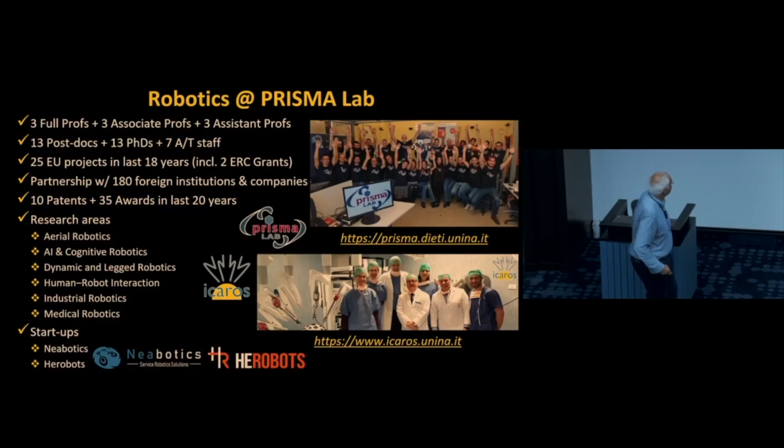And then recently, we've been active in AI and cognitive robotics. Two of the faculty in our team are not engineers, they are computer scientists, because I really like to have an interdisciplinary group. And also, following my ERC Advanced grant, we started working on dynamic and legged robotics, although this is more recent work. This was kindly mentioned by Cecilia.

This was a textbook, but it's now the old textbook, published in 2009, and it was translated into Chinese, into Italian, because the original book was in English, and also into Greek. And this was a sort of accolade for me, because in Italy you can do either the classical or the scientific high school. And since I was good in math and physics, I studied in the scientific high school.

But I always liked human sciences, like literature, philosophy, history, and also Greek. But I didn't study Greek. At least I can say that I have a classic book in Greek, although this is modern Greek, not ancient Greek. And the other day, I got an email from the publisher, because we have a new textbook, Foundations of Robotics.

This was published in September 2025, and the book is radically changed. It's been extended thanks to the contribution of a new co-author with us, because Professor Sciavico, who was my mentor, retired and is no longer active, and we were very lucky to recruit as a co-author Alessandro De Luca. He's a professor of control and robotics at Sapienza University of Rome.

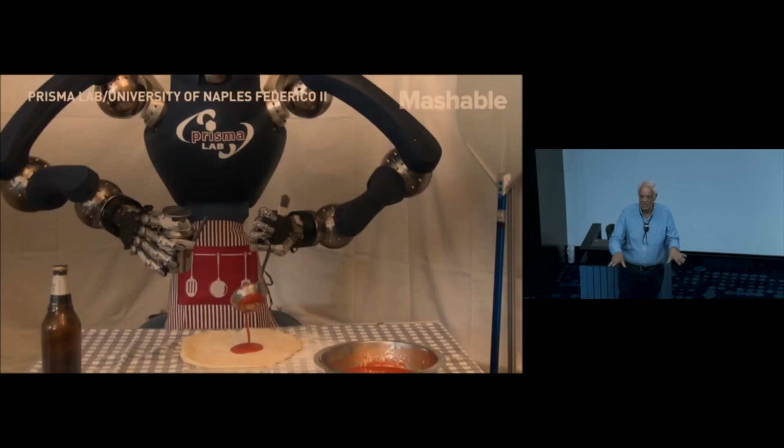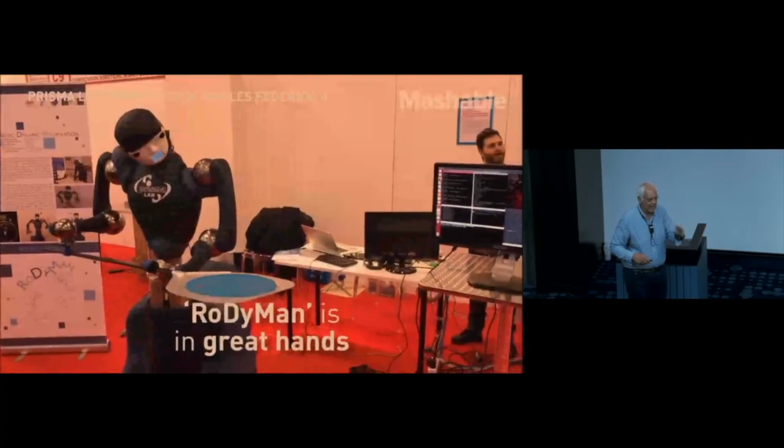Why? This video had, I think, several million views on Mashable platforms. When you have the dough of the pizza, you stretch it, so it's undergoing deformation. Is a robot capable of doing this? I don't know. Seasoning is the easy part. Tossing is very difficult. And we didn't succeed with electric motors, because you cannot succeed with an electric motor in this kind of tossing.

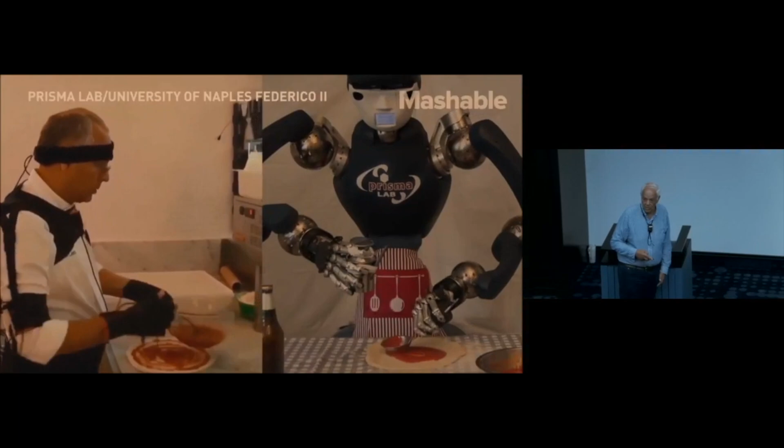Baking is a control challenge. This is a pizzaiolo chef that we involved. He's been the first pizzaiolo chef in the Michelin guidebook, one of the best pizzerias in Naples and probably in the world. We were acquiring his motion from an Xsens suit, and through the Jacobians we were transforming it to the kinematics of the humanoid robot that we developed. We also developed software with the avatar, with this biomechanical data. So cooking the pizza is a control challenge, and I will explain this in a minute.

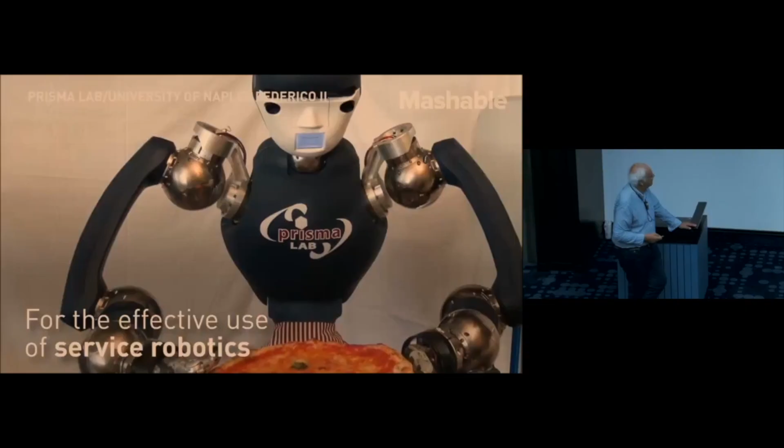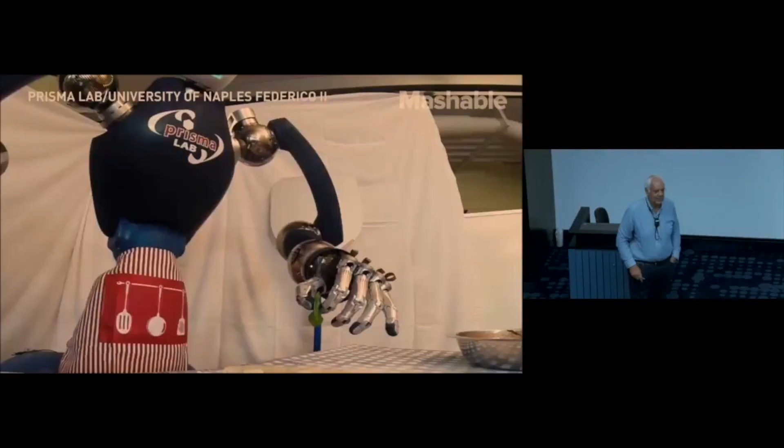So when I proposed this idea to my students, they said, Professor, you're crazy. We cannot ask 2.5 million to the ERC for a pizza-making robot. I said, look, the challenge is not to replace the pizzaiolo. It's just to show the complexity of the benchmark. And it was also a great media expedient to attract the attention of popular media to research in robotics carried

out in Naples. We were featured by BBC, by CNN, by Sky, by Scientific American. We were on page 3 of the Times newspaper of London, because of the idea. And during the life of the project, from 2013 to 2019, pizza became UNESCO heritage. So you can imagine that everybody was contacting us. So this was a sort of smart dissemination idea.

But let's look at the challenge. Why non-prehensile manipulation? What do you gain with non-prehensile manipulation? Actually, we do a number of tasks in which, of course, we want to use the hands, but the power of manipulation. Remember the old concept developed by Ken Salisbury at MIT, WAM. WAM stood for whole arm manipulation. We can do manipulation also with our body, with our arms. So it's the same concept of soft robotics, of the tentacle of the octopus.

So we have to just break the paradigm that, of course, a child in the first months of their life, infants, what they do, they just grasp all the objects, okay? But also we learn how to manipulate with our body. And the difficulty is that the modeling and the dynamic issues of non-prehensile manipulation are very, very challenging. And it's impossible to develop a sort of general theory. So it was a sort of groundbreaking challenge that we were tackling during that project.

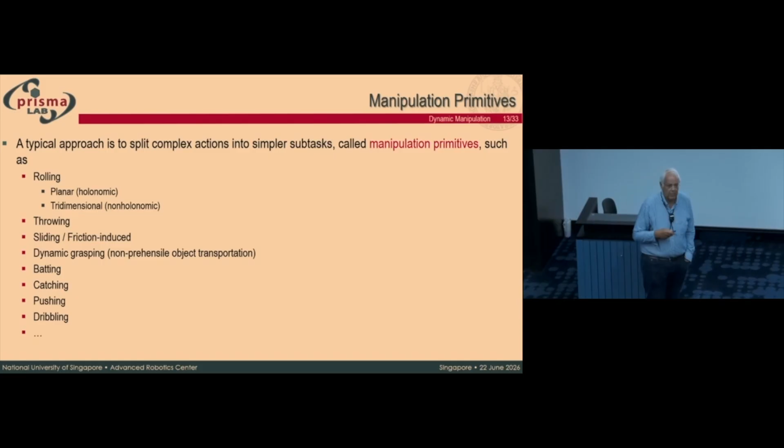So the best we could do is to develop some sort of manipulation primitives and to solve with some kind of model-based control techniques challenge by challenge. So we analyzed rolling, throwing, sliding, friction-induced, dynamic grasping, batting, catching, pushing, dribbling; these are all examples of dynamic manipulation. Let me show you some results.

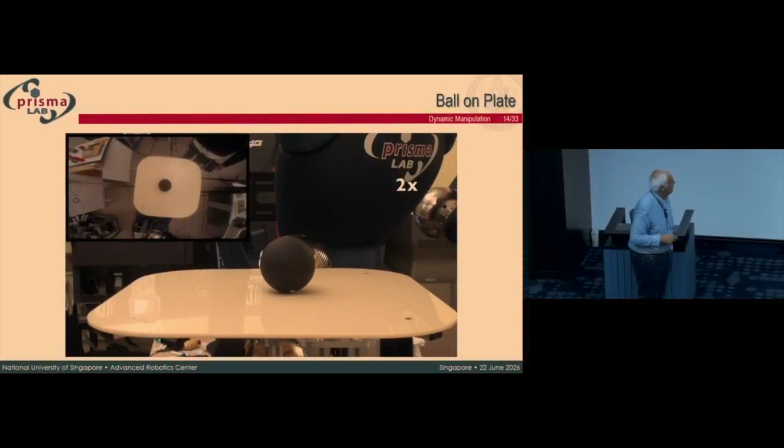So at first, like balancing a sphere on a plate. And as you see, that's the camera, that's visual servoing. So basically, we want to stabilize the position of the sphere on the table. This is a sort of nonholonomic constraint, because basically the motion of the plate is 2 degrees of freedom, and that's doable. But you also see that white spot.

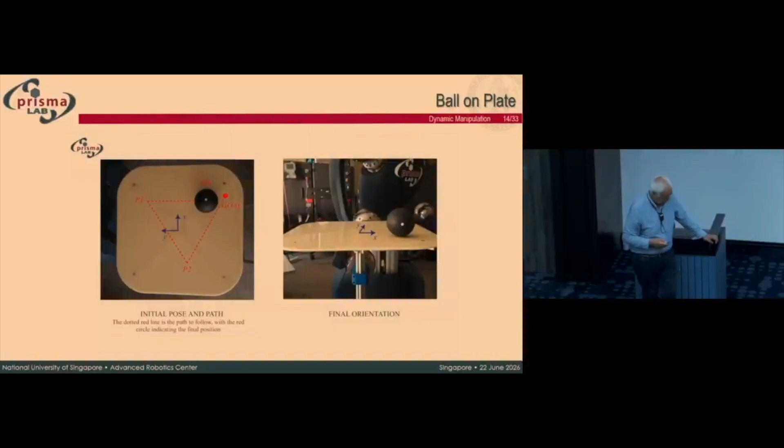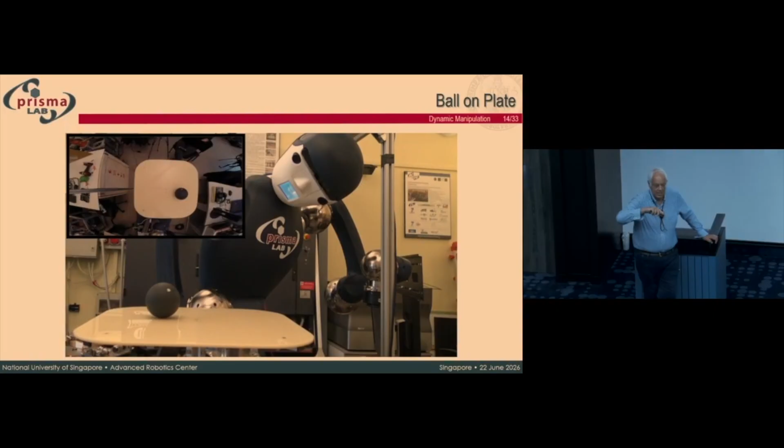Now, we want to control 3 degrees of freedom. So we want to control not only the position of the sphere, but also the orientation, that is that kind of white spot. And here you see the exploitation of redundant degrees of freedom in such a way as to reconfigure the humanoid hyper-redundant system to perform the task successfully.

And then you can also do a sort of movement along a path with a suitable trajectory. And likewise, you can do this in a stable way.

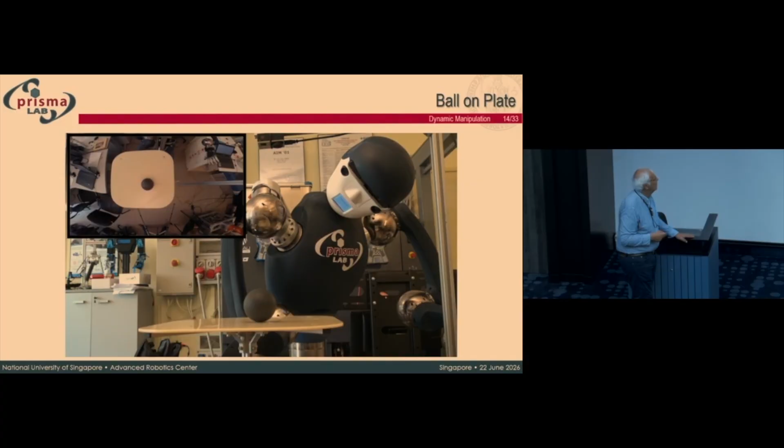Then we extended this work, and now the ball is a kind of tire. And the ball can fall not only on the two sides, but can also fall on the other side. And as you see, with visual servoing, it's capable of stabilizing the ball without falling from both sides. So this is just to show that this would be a task that for a human would be very, very difficult, because it's kind of a critically stable system, as you see.

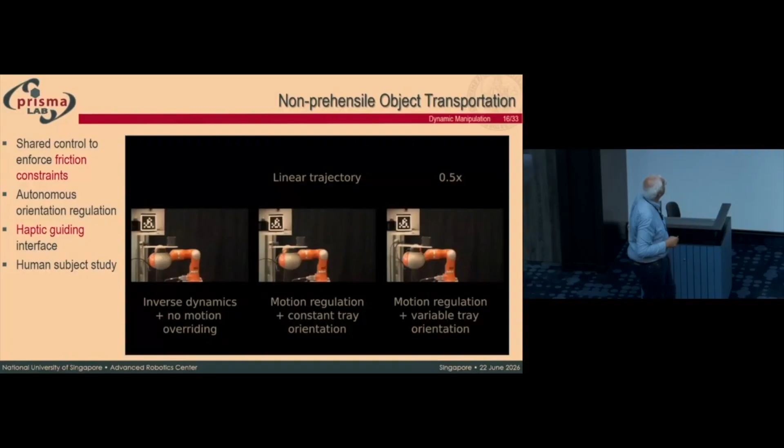Then some other examples of object transportation. This was a recent paper published in Transactions on Robotics, in which we were testing different kinds of algorithms. But the novelty of this study is that we involved human subjects with a haptic guiding interface. So basically, it's like a waiter, like a robot waiter. You have to carry an object on a tray.

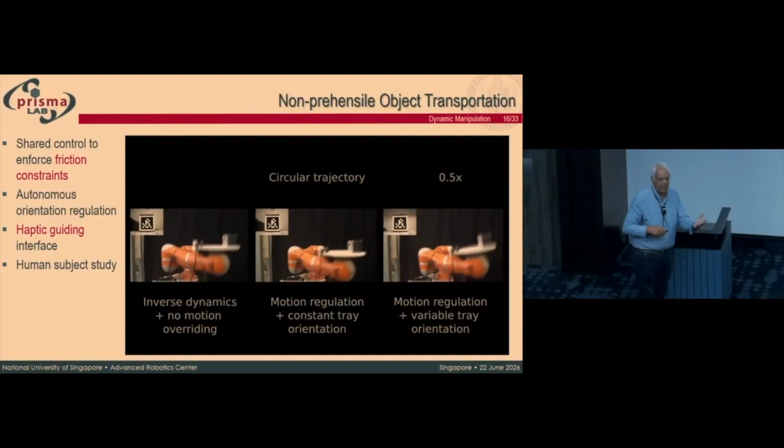And typically, if you want to do this kind of task autonomously, you can, of course, exploit the friction constraint. I don't want to go into technical details. I try to give a sort of overview. So these are different kinds of dexterity measures that we are using, with different conditions. And in most cases, what happens is that typically the object just falls apart, just because of the dynamics of the task.

And instead, with our kind of new scheme that we developed, in which we use the shared control. So this is a human in the loop. So that's why this is interaction. This is a physical interaction. So you see the haptic interface, it's capable of moving the object around without falling.

Okay, and this is something that I haven't seen yet in humanoids. So can you imagine a humanoid to do this? Personally, I doubt that you can do this kind of task, just as commanded by a human.

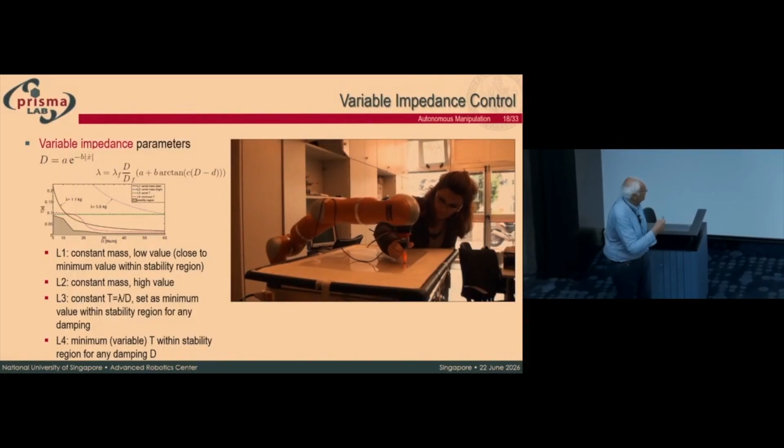So the second part is devoted to autonomous manipulation. And this was mentioned by Marcello when he introduced me to his students. We've been working consistently on force and impedance control. This was a study done in one of the European projects. It's the concept of variable impedance control.

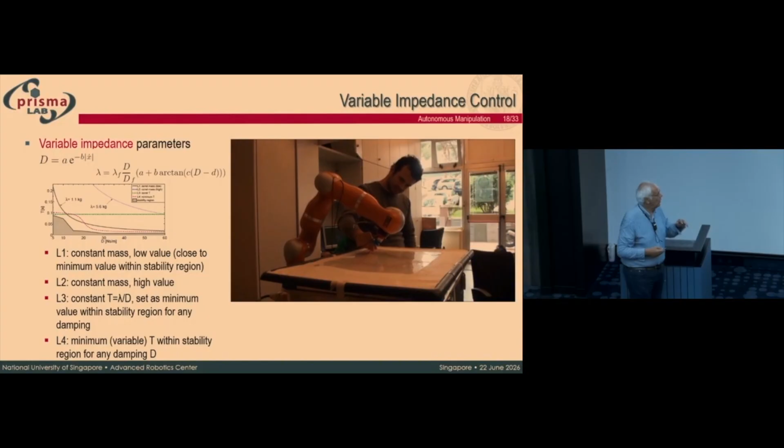So basically, this is a cobot, because it's a KUKA lightweight robot, so it's compliant, but the user might be different. And this is adapting naturally to the inertial characteristics of the user to guide the user just to draw with a pen on a sort of flat surface. And here we are testing different manipulability indexes.

And the nice thing of this study is that you can adapt the parameters of the impedance in such a way to naturally adapt to the inertial characteristics of the human, just to offer the smoothest possible guiding of the pen of the robot by the human. You saw like 6 different people doing this kind of task, and this worked quite effectively.

I've been teaching robotics now for 35 years. And when I go to class, one of the first concepts that I fly into the audience is that robotics is not much more than Jacobians. The Jacobian, in my opinion, is the most important mathematical tool for robotics. And this is one example.

Now we go back to prehensile manipulation, like with the hand, okay? And the problem of mechanical hands, of robotic hands, is the mechanical complexity. Because a hand has 20 or more degrees of freedom, and it's impossible to conceive a hand with 20 motors. This would be very, very primitive.

So one trend in designing anthropomorphic multi-finger hands was the concept of minimalism, the concept of reducing the number of motors and using cables and tendons to achieve the actuation with a reduced number of motors. And actually, this is one example of cross-contamination with another field, because a colleague of ours at Arizona State University, Marco Santello, a neuroscientist, developed a very nice taxonomy of all the possible grasps of a human hand, and he classified 36 different grasps.

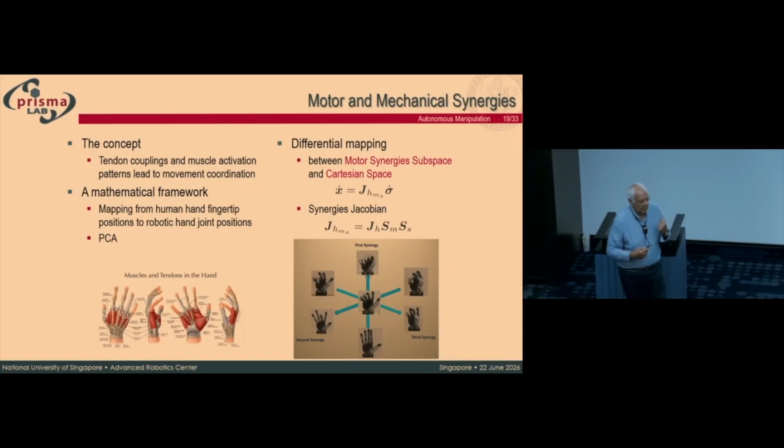And the nice thing is that in these grasps, humans do not move the individual phalanxes of the fingers. You really have to think intentionally to move a single phalanx of a finger. We move the hand and the fingers in a sort of synergetic way, even infants when they grasp the object. So his studies show the concept of postural synergies. What is this concept of postural synergies? It's very simple. Basically, the motion is not of the individual finger, but you move the fingers all at the same time.

And this is one example where the mathematics is beautiful, because this is nothing else than the principal component analysis of the grasp matrix, singular value decomposition. So you compute the main eigenvectors of the singular value decomposition, and the nice thing is that with the first 3 eigenvectors, these are the so-called postural synergies, you can describe more than 80% of the taxonomy of the grasps by the neuroscientists. So this is amazing. So in a way, why should we dare to control 20 plus degrees of freedom?

So this can be used in terms of the suitable Jacobian, the suitable mapping from the motor synergy subspace to the Cartesian space. And it's all a game of Jacobians. But we could use this in a sort of constructive fashion to rethink the design of hands in such a way to have a hand with one motor, with two motors, and with a system of cables and tendons to achieve the different degrees of freedom. So this is the concept of mechanical synergies.

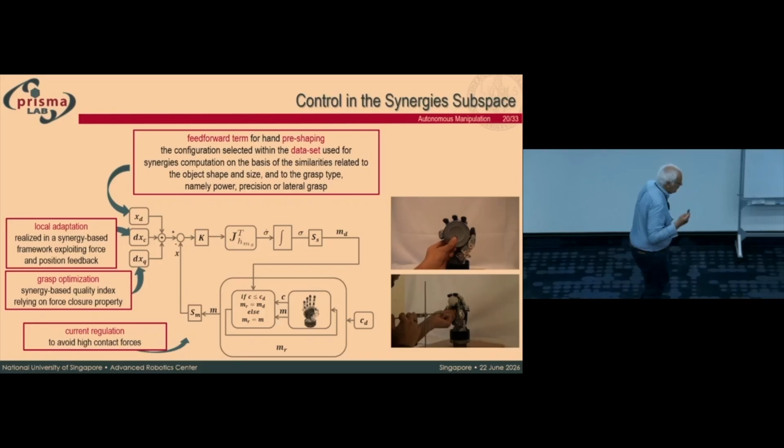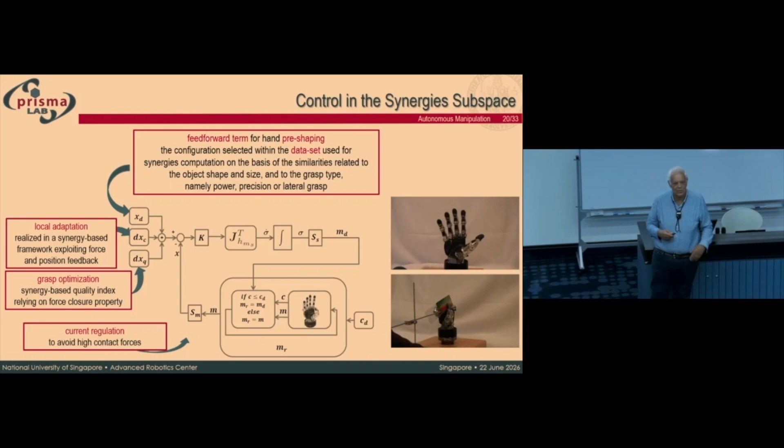And we apply this kind of framework within, I mean, if any of you has studied on any of the textbooks, you know the famous CLIK concept. The CLIK concept is the closed-loop inverse kinematics concept using the Jacobian inverse or pseudo-inverse or the Jacobian transpose. And this is one application.

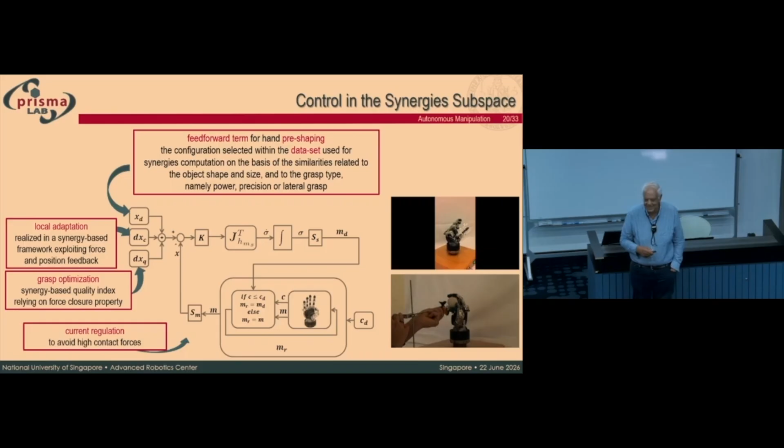I made one mistake when I wrote the first paper in Transactions on Systems, Man, and Cybernetics in 1986, because before submitting the paper, I should have patented this. But at that time, you know, I was a young PhD graduate, so I was only daring for the glory.

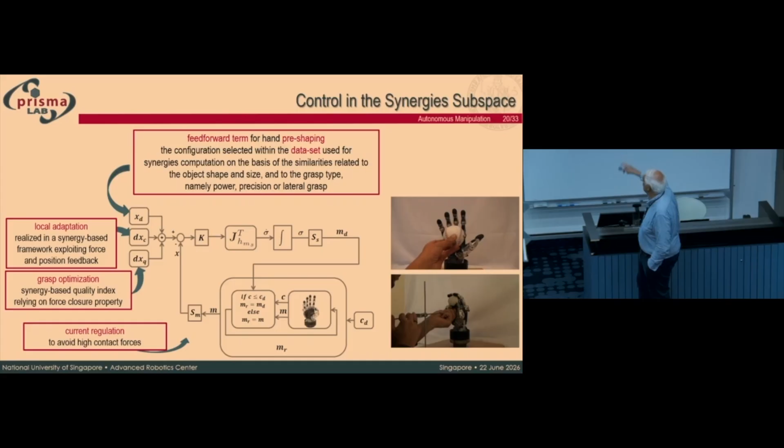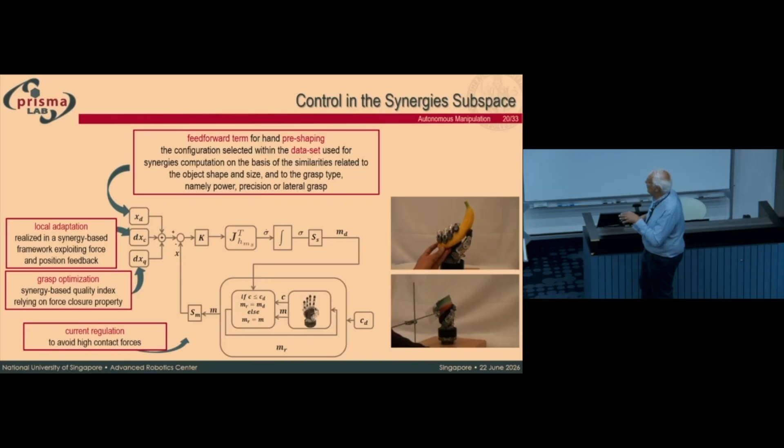I didn't think about just making profit about this. But this concept has been used in all commercial systems. And we extended it in this study; this is the Schunk 5-finger hand, in which we use the concept of the Jacobian transpose. The novelty here is that we provide the reference motion according to a synergy-based framework in which we also exploit feedback from the encoders and also from a force sensor.

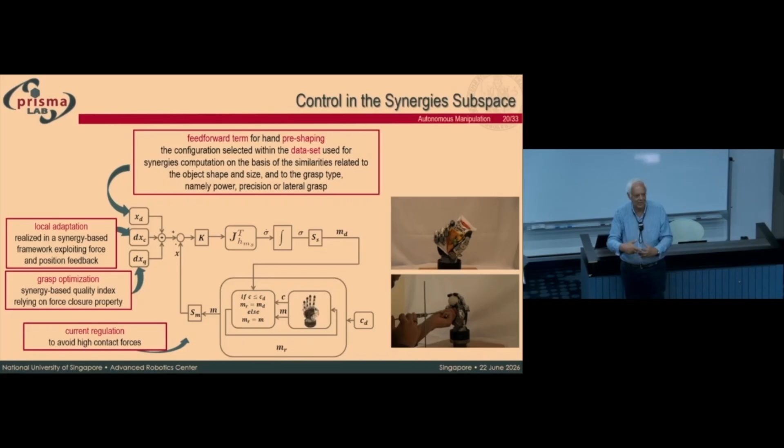We use a force torque sensor. I think this was a JR3 sensor, if I remember well. So we can generate the desired motion also with a sort of grasp optimization technique in which we optimize a synergy-based quality index, because we have to ensure that the grasp satisfies the so-called force closure property. This new stuff is in the new textbook, because we included cooperative manipulation and grasping, which was missing in the old textbook. So this works quite effectively for different kinds of grasps.

And also, there is a sort of reward function that is driving the neural network, in which we achieve a sort of trade-off between the exploration by the hand of the environment and recognizing the object, and the exploitation of the characteristics of the grasp, just to recognize how to properly grasp the object. And this worked quite nicely.

As I mentioned, aerial manipulation became a main topic in the research team. And again, there is an anecdote, a story behind this. I remember this was 2009. I got a phone call from a colleague and a friend at University of Bologna, Lorenzo Marconi. He's a control guy. He had started working on aerial robotics because he was always using drones also for photography and things like this. And so he called me, saying that he was proposing this new European project on aerial manipulation.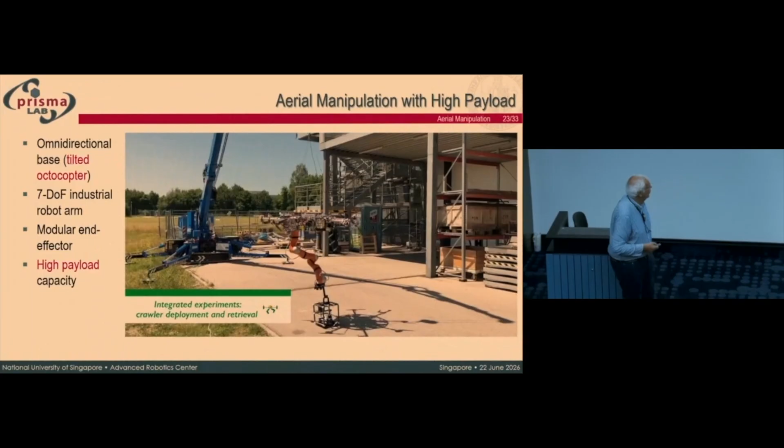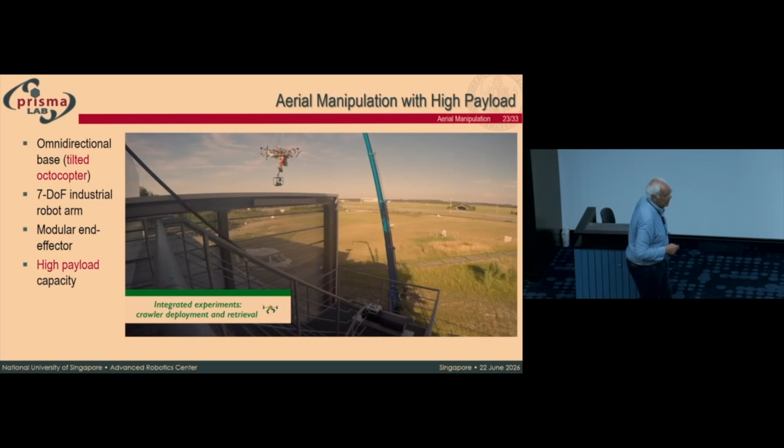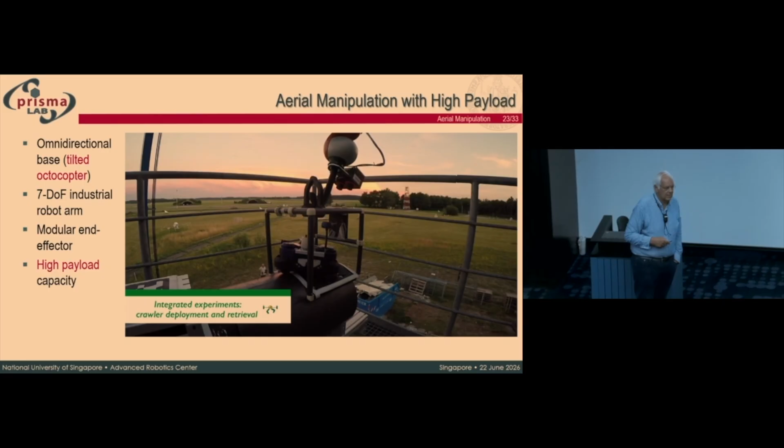This is not the AIRobots project. It's a following project, the AEROARMS project that we did with DLR and Sevilla and other partners, in which we were using the KUKA lightweight arm as a payload for a huge octocopter. So this drone has 8 powerful motors. Of course, autonomy is always a challenge, but we have some experiments of crawler deployment and retrieval. So you can control all the degrees of freedom of the system to do some tasks autonomously using the well-known KUKA lightweight robot, with the very high payload capacity.

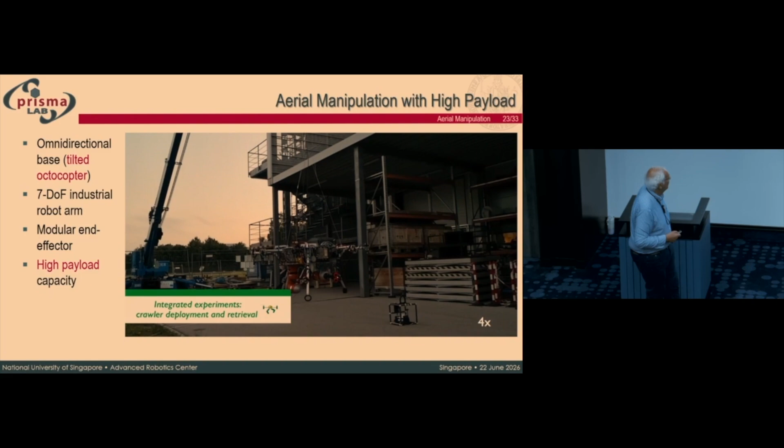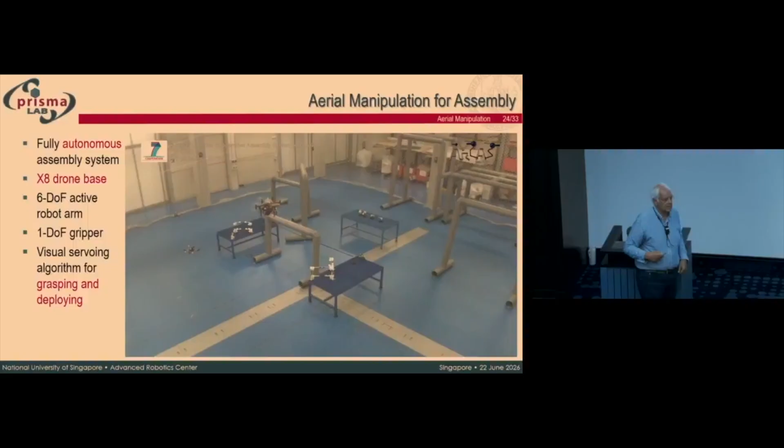Another example of manipulation with a sort of bimanual system. So this is the ARCAS project. ARCAS stands for Aerial Robotics Cooperative Assembly Systems, in which this is all autonomous. So we have an X8 drone base with a 6-degree-of-freedom robot arm on each drone, and then a 1-degree-of-freedom gripper.

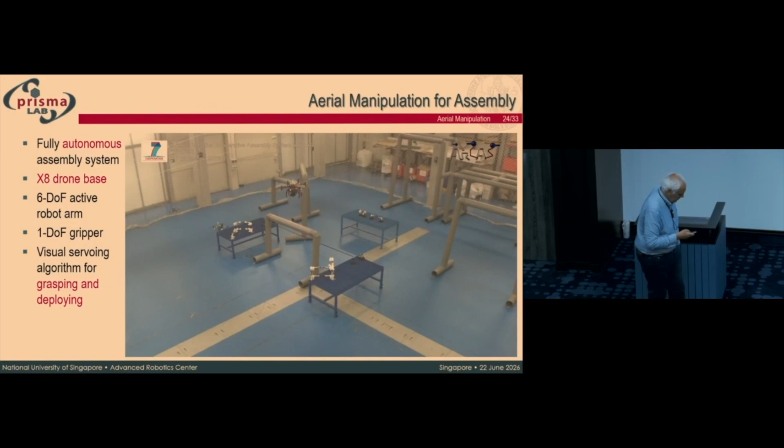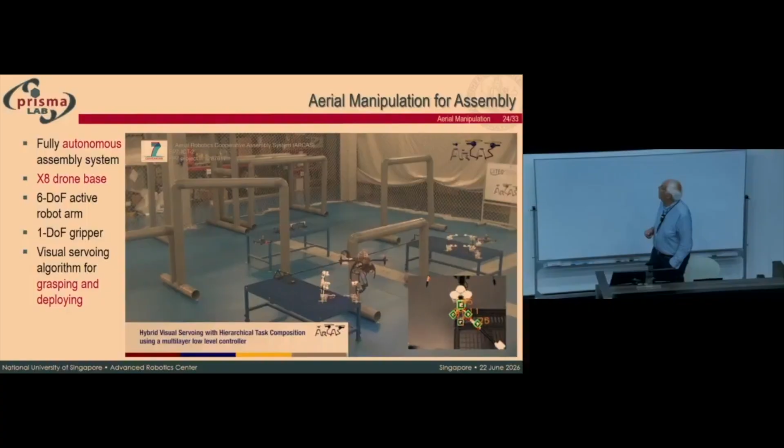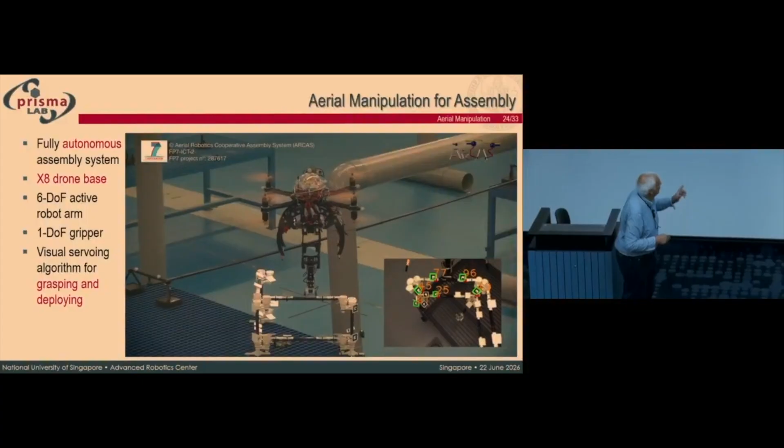And this is a typical industrial environment, a cluttered environment. So the system is avoiding all the obstacles. And so you carry this. This is typical mounting of a sort of truss structure in which we do cooperative transportation and deployment.

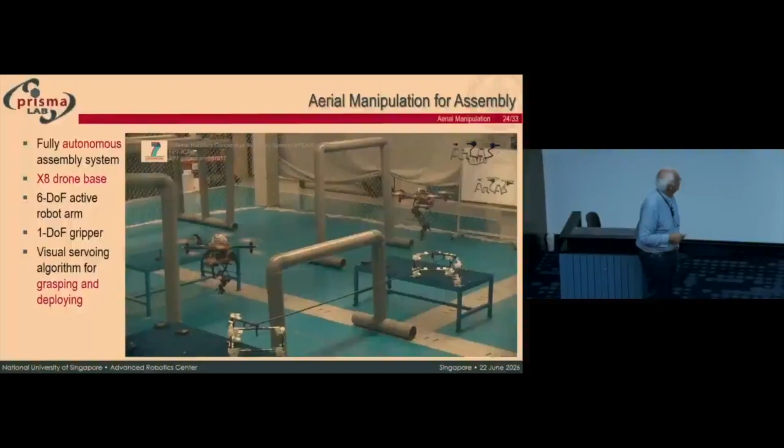Then I have another application for power grids. This is a task that is both expensive and also sort of dangerous: inspection, maintenance and repair of the power grids. And here we brilliantly solve the issue of autonomy of the drones by installing some autonomous recharging station on the line to exploit the magnetic field, so the drone does not have to fly back but recharges while on the line.

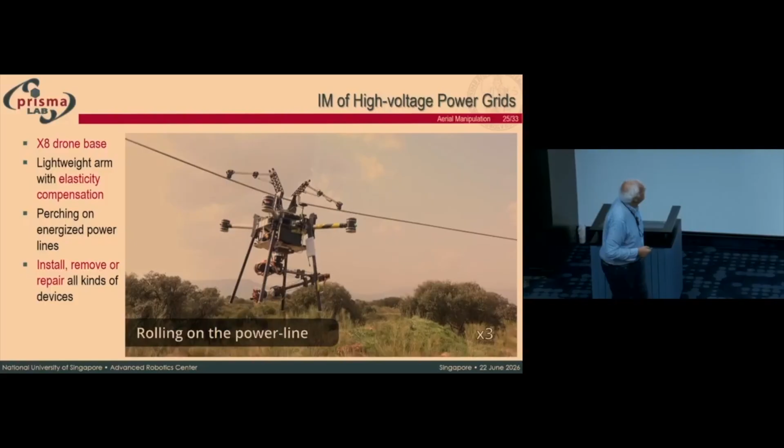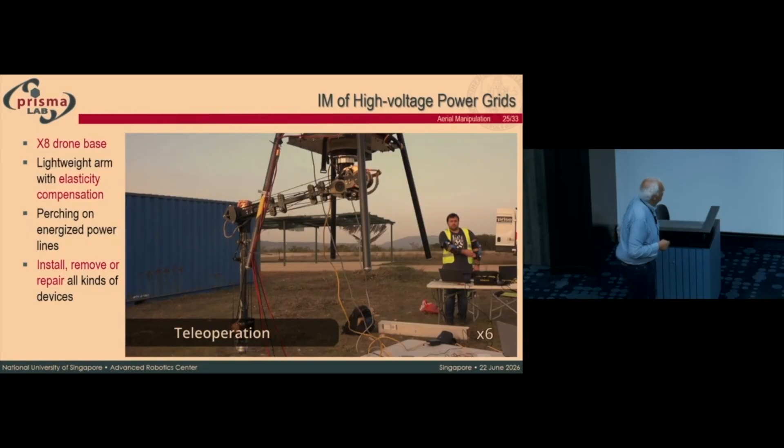And the issue here is the installation, removal, or repair of all kinds of devices. So the system can be teleoperated, if you wish, by a trained operator. But then it flies on the line, it just lands, and then it has some kind of rolling wheels to go along the line.

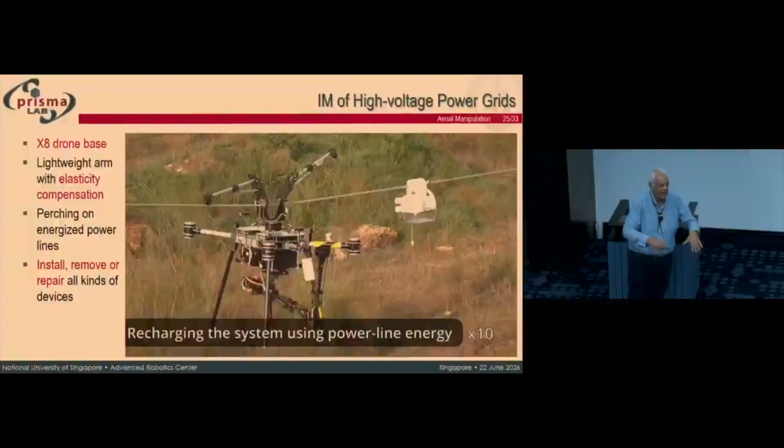And this is, for instance, the installation of a bird diverter, because when the birds migrate, they tend to just sit on the line and they overload the line, and the line can even be broken because of the weight of many birds, or maybe they get kind of dirty. So they use this kind of bird diverter.

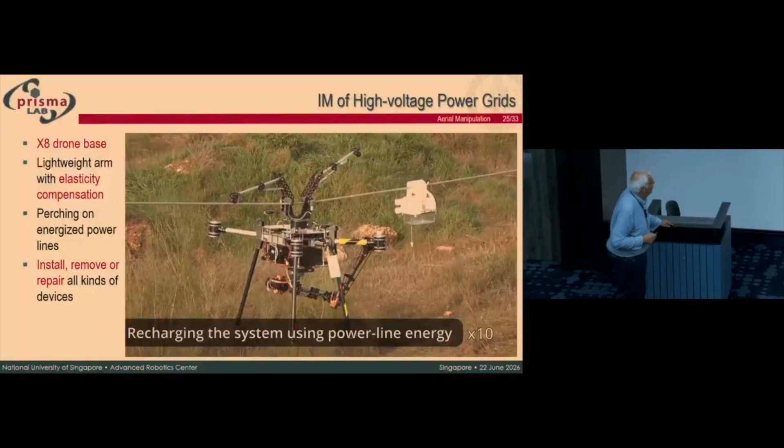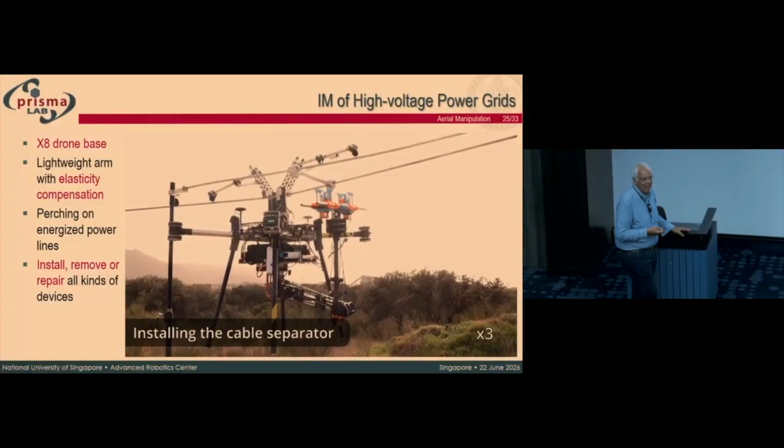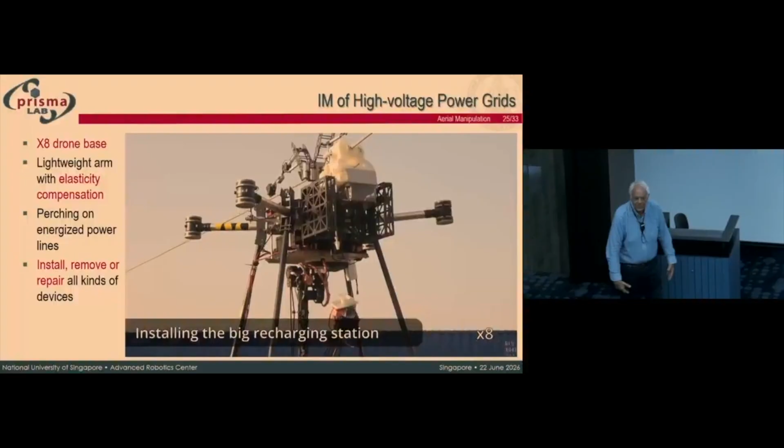And the nice thing of this project is recharging the system using the power line energy. So basically, you can exploit the fact that you're repairing an electric power line. So why not use the energy? For some of these tasks, the operators are flown by helicopters with some kind of ropes. So it's a task which is very expensive and also sort of dangerous for the operator.

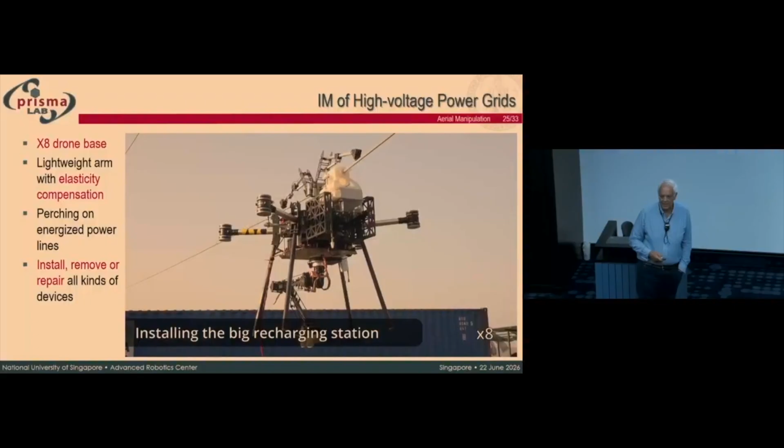Another application of aerial robotics technology is in non-destructive testing. Think about the tragedy of the Morandi Bridge that fell down in Genova in 2018. 43 innocent people were killed because the bridge collapsed while people were driving their vehicles on it. This was also because of lack of systematic inspection and maintenance of civil infrastructure.

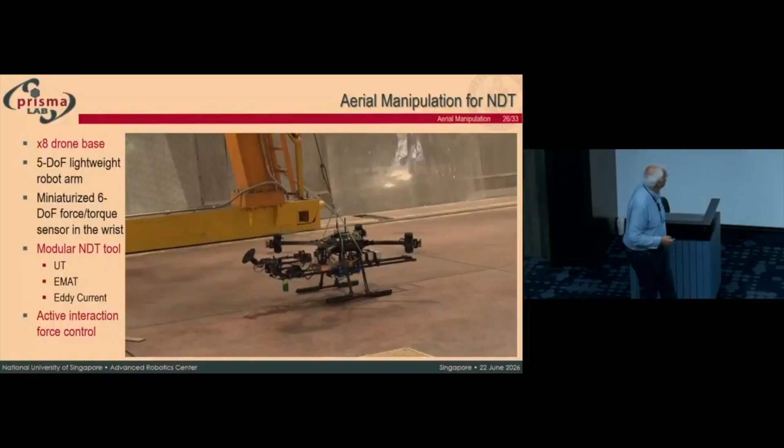So this is another application in which we implemented our techniques for force motion control, developed originally for ground-based manipulation, to the concept of aerial manipulation. This is active interaction force control, in which we have a 5-degree-of-freedom lightweight robot arm with this X8 drone base, and we are testing the walls to see if there is any crack, to check the integrity of the wall.

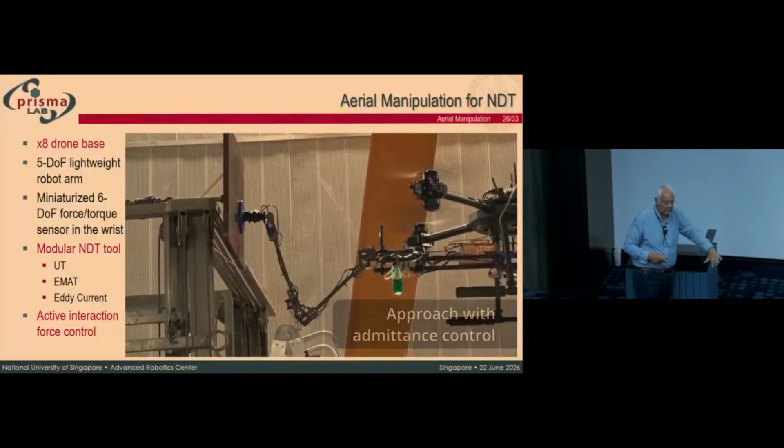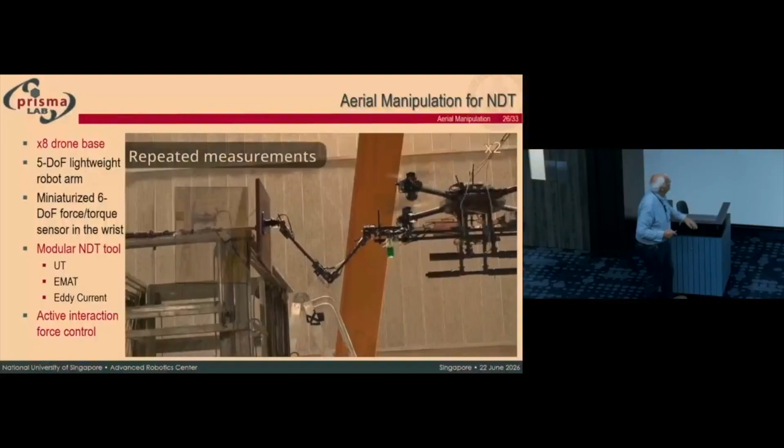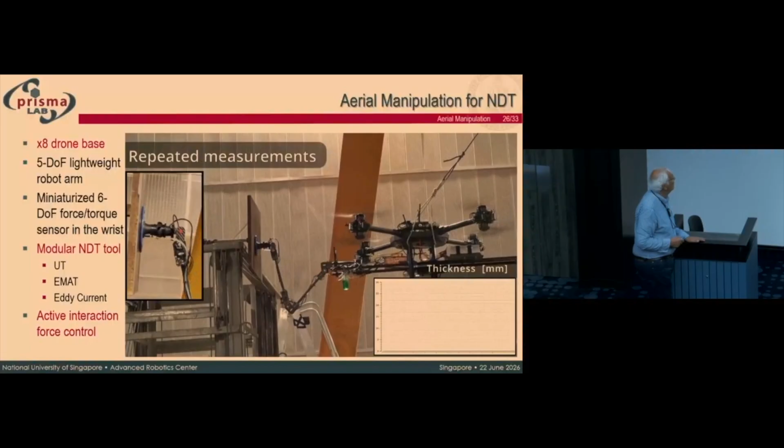And it's also nice because we developed hybrid force motion control in which we apply 3 Newtons to the wall to check the structural resistance and integrity of the surface. And the tool that we've developed is a multi-sensor tool for non-destructive testing that includes UT, EMAT and eddy current sensors. Another example of interaction technology, I would say.

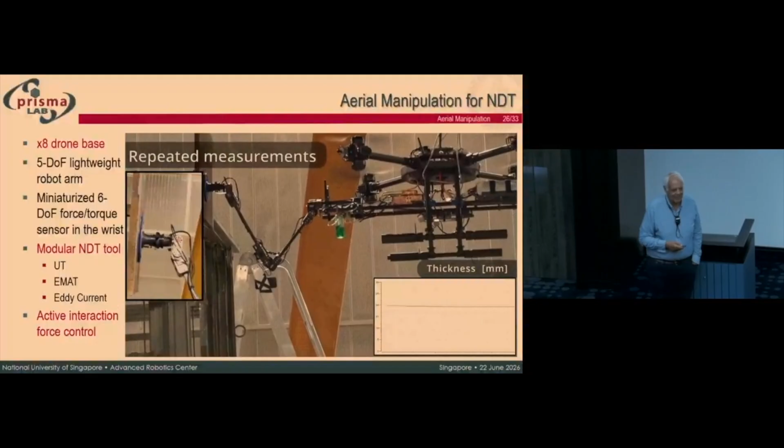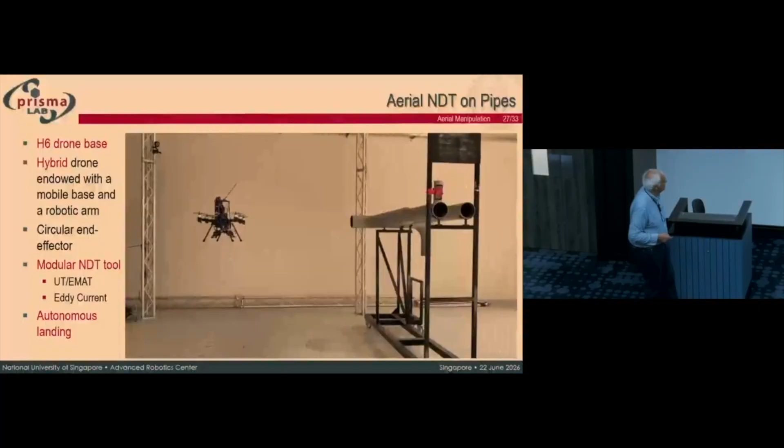And I'm kind of skeptical about generative physical AI to do this kind of task, honestly. So another application is this H6 drone that we designed in house. This is, again, aerial non-destructive testing on pipes. Think about an oil duct or a gas duct. We want to check the thickness of the pipes to see if there is a potential crack, because if there is a leak of gas or oil, there is also a cost involved.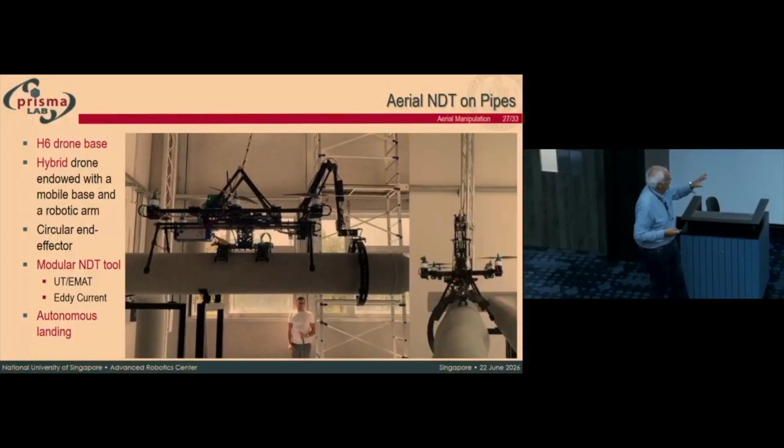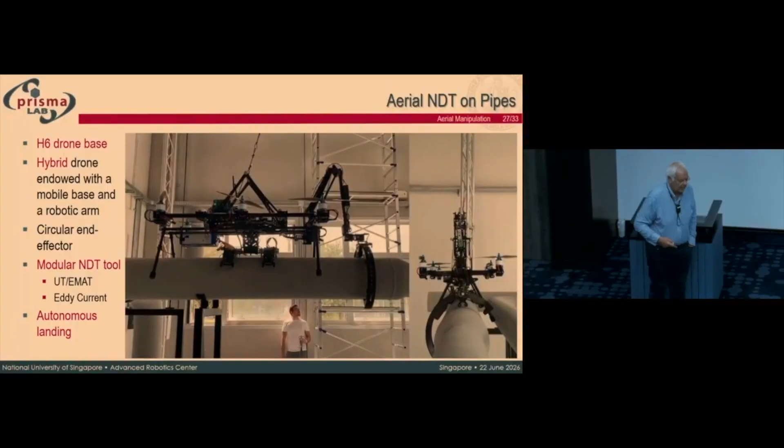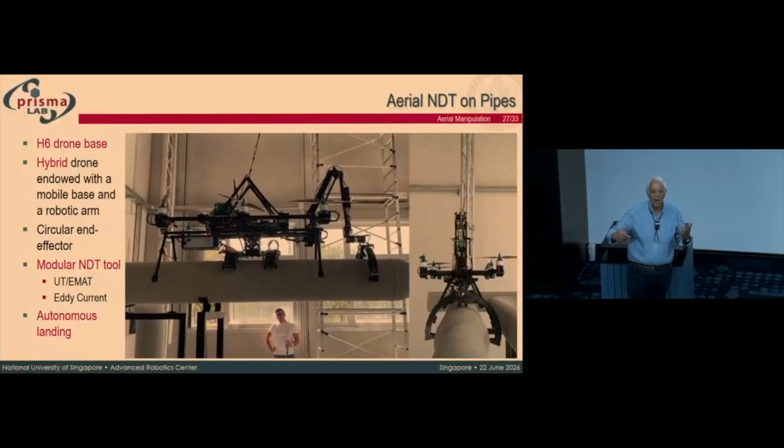So the system flies, lands on the pipe, then has some rolling omnidirectional wheels, and goes with this thickness tool and systematically checks the thickness of the pipe. And there is another version that I cannot show because it's part of the startup work, in which we improved this concept with a sort of koala robot. The drone flies this koala robot onto the pipe and then flies away. And with very little energy, the koala robot checks all the pipe and can also revolve and check the thickness of the pipe.

I also have another application: we also developed some hybrid drones, amphibious drones. I very much like the bio-inspired nature of this kind of technology. The idea is to develop a sort of metamorphic robotic system in which we can use the rotors of the drone, once it lands on the water, to provide some sort of propulsion, not just flying out and landing in another place, but to be able to navigate and do some probe testing, maybe checking for pollution in the water or any kind of test.

But I didn't include any slide. The final part is about haptic shared control. What is haptic shared control? It's like, you have the two extremes, teleoperation or autonomous. If you have the human in the loop through some sort of haptic interface, you have to trade off the control authority between the human and the machine. This is what is meant by haptic shared control.

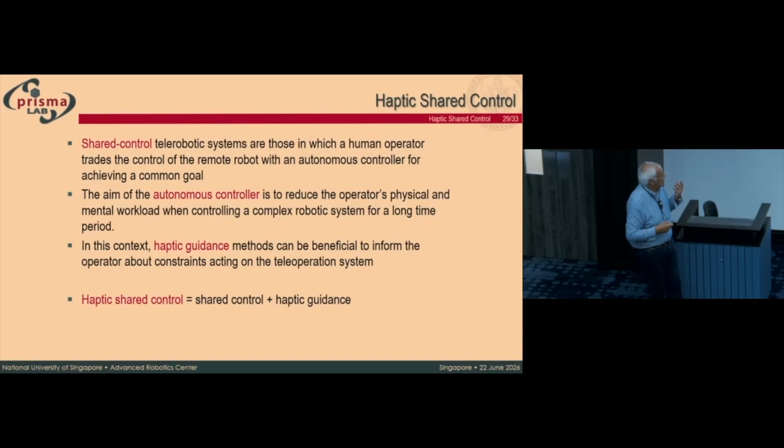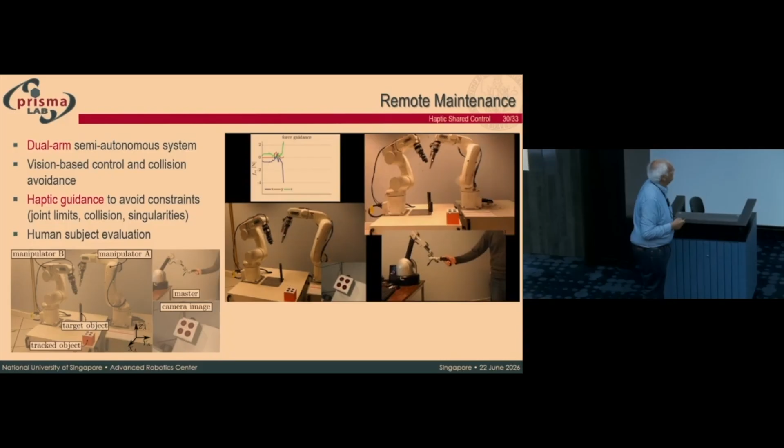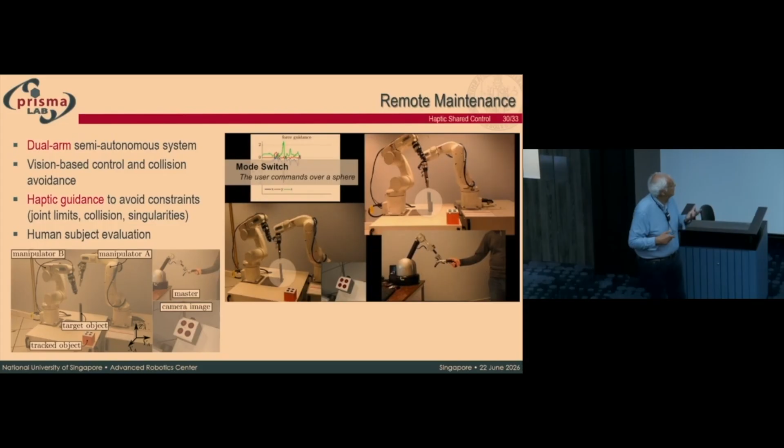So this is, for instance, one application with the bimanual manipulator. So we have a dual-arm semi-autonomous system. We use vision-based control and collision avoidance. And through the haptic guidance, you're naturally led to avoid any kind of joint limits, mechanical joint limits, singularities, and also collision with potential objects in the field.

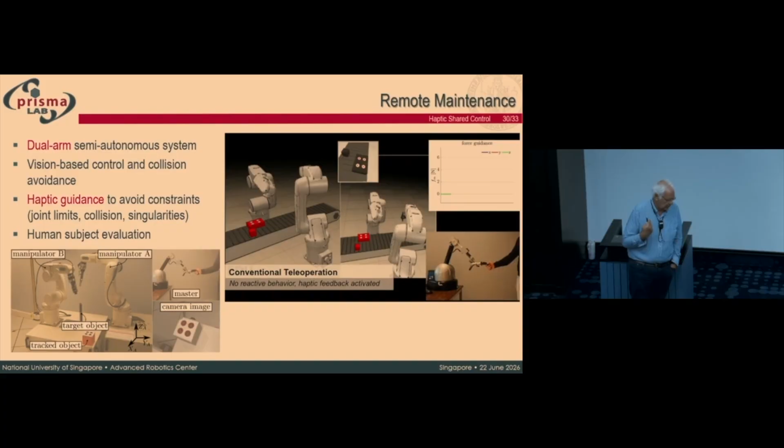And also in this study, this was a work that we did with a group in Rennes, the group of Paolo Robuffo Giordano. He's a CNRS research director and is working at INRIA in Rennes. And Mario Selvaggio, one of my research associates, tenure track assistant professor, did this work. I think we published, I can't remember whether, I think it's Transactions on Robotics or maybe Robotics and Automation Letters,

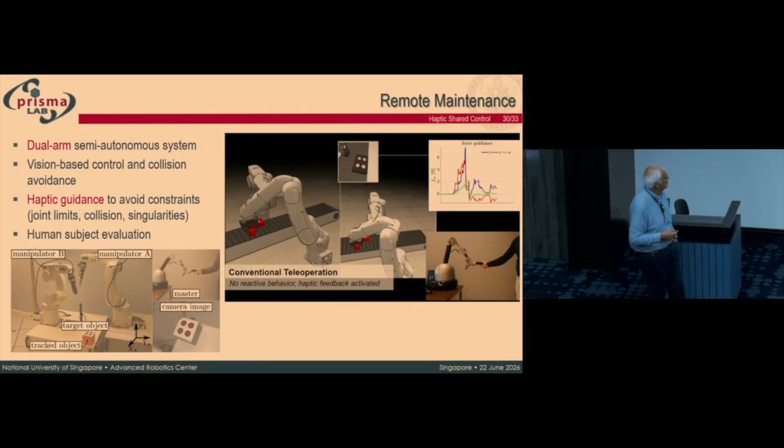When the surgeon operates, even with the Da Vinci system, one of the time-consuming and stressful phases of a surgical operation is the suturing. And you cannot make mistakes in suturing. Actually, if you have removed maybe a cancer mass or an organ, you have to reconstruct the anatomy of the tissues. This is what is called in the technical field anastomosis. And the manuality and the dexterity that is required is very accurate.

So the concept here is to use the variable impedance concept that I showed in my previous slide through a haptic interface to provide a sort of guidance for the surgeon to suture the tissues in the most optimal way. And this is the concept of virtual fixtures.

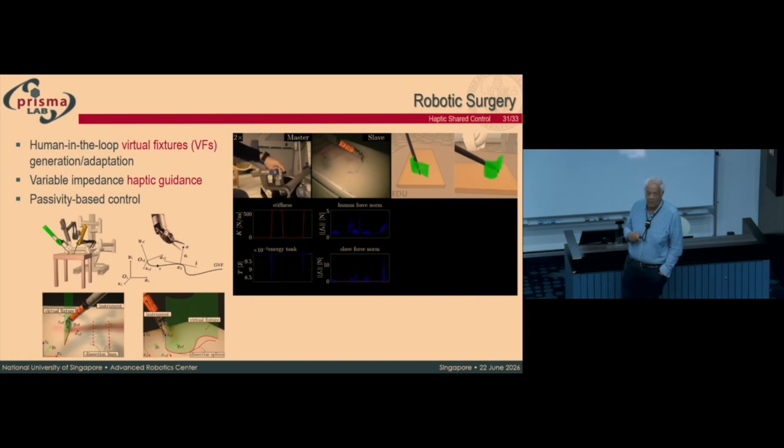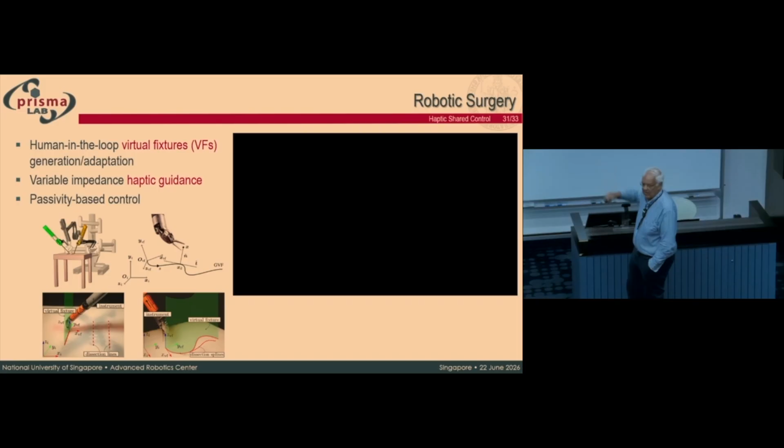So remember, from the ontological viewpoint, the responsibility of any surgical operation always stays with the surgeon. And it must be that way, of course. But in a way, the system can guide the surgeon to suggest what are the best paths to do the suturing. So this is the concept of the virtual fixture.

And as a final slide, I have an application of my current grant, the Synergy grant. This is a very important social challenge because the overarching goal is to fight colorectal cancer. Colorectal cancer is the third worst cancer killer for humans. And the data in Europe say that the mortality rate is 50%.

Why is it so high? Because the level itself of mortality of this cancer, if diagnosed in time, is not as bad as other cancers, like, for instance, pancreatic cancer, which is fatal. It has a level of mortality, if diagnosed in time, comparable to breast cancer, to prostate cancer. But why in Europe in 2020 were there 600,000 cases diagnosed and 300,000 people died? This is unacceptable. Why is that? Because people do not undergo systematic screening.

Of course, at my age, I did 2 colonoscopies already and 1 gastroscopy. And next year, I'm scheduled for the next colonoscopy and gastroscopy. That's the best that we can do to diagnose in time. And also, the problem is, how is this typically performed? Through a colonoscopy. That's the most reliable exam.

But the manipulation ability of a colonoscope is very reduced. Only the skilled endoscopist can remove the polyp. A polyp is a sort of suspect cancer mass, but the excision of the polyp does not guarantee that you have safe oncological margins in such a way that the cells are not spread to the nearby organs, and this might cause a metastasis.

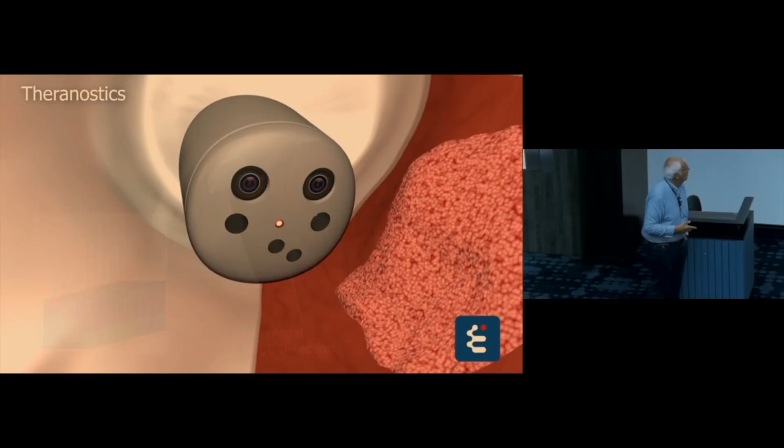So this is our capsule. That's the rinsing channel there. And it's like stereoscopic vision, white light illumination. And this is a multi-sensor probe, which is exploiting all-optical ultrasound together with a technique which is photoacoustic endomicroscopy, because some of the adenomas are flat, and it's very difficult to understand how to excise and how deep you have to excise. So that's why you need the diagnosis.

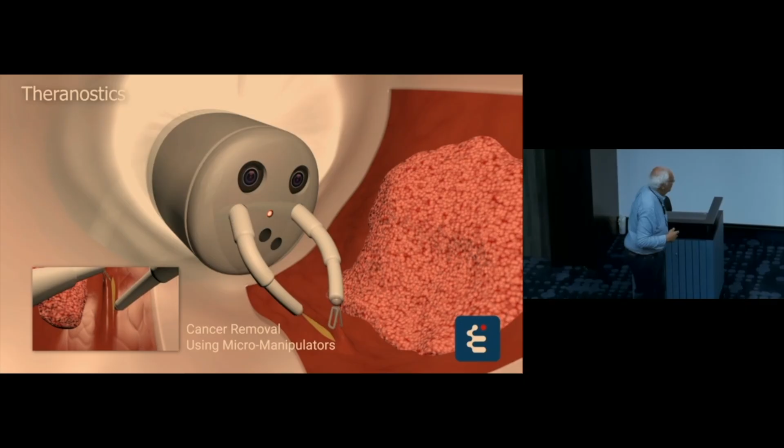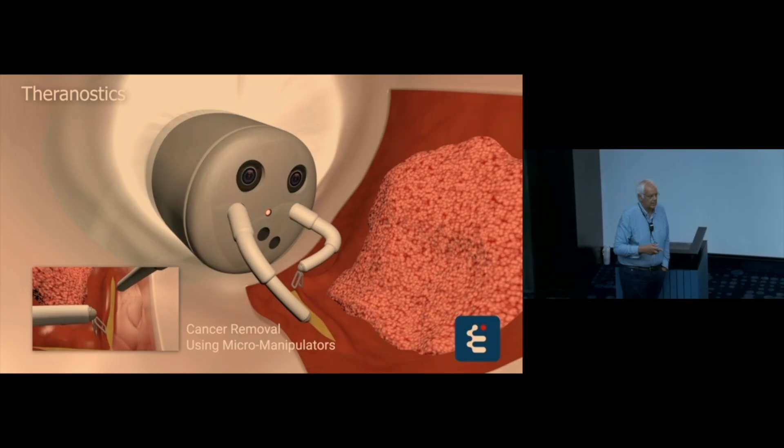And then this is a bimanual micro-manipulator, one arm with a cutter, another one with a fenestrated grasper. And the technology we are using to develop this kind of system, which I was discussing with Cecilia during the visit, is the concept of concentric tube robots. This is the technology that we are using. So that's the concept. And then you can aspirate, and then you can drive back, and then just remove. So the idea is to do this kind of colonoscopy with diagnosis and surgery in one stop.

That's all I have. I cannot avoid concluding this with my inspirational motto. In 2002 in Sant'Angelo in Ischia, we organized ISER, International Experimental Robotics, and Roland Siegwart, our friend from ETH in Zurich, was committed to organize the next edition of ISER. And thanks to a very good bottle of wine we were enjoying after dinner, I came up with this: Roland, you have to keep the gradient. And then this has become a sort of inspirational motto.

Of course, you are all in mathematics, you know what a gradient is: a gradient is a derivative of a function of multiple variables. And the multiple variables are the variables of life. So keep the gradient is a sort of motto that you really have to consider all the variables in your life, and possibly just move and go ahead along the positive direction of the gradient. Thank you very much indeed.